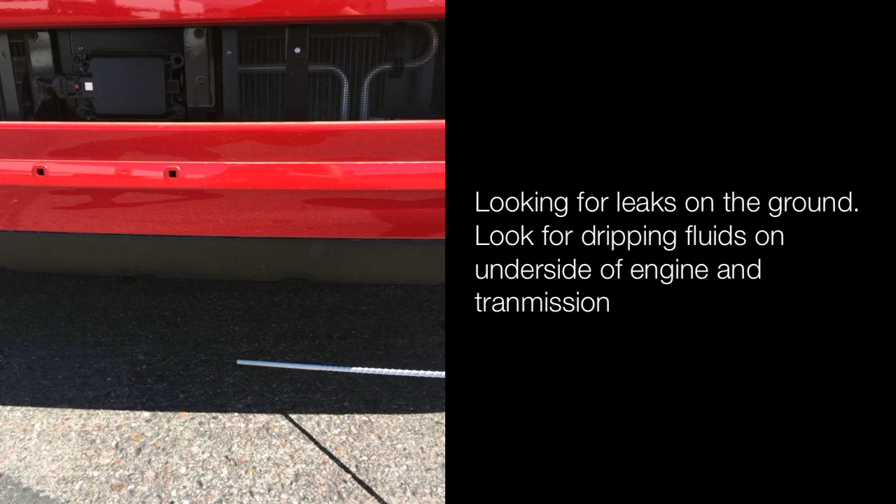Looking for leaks on the ground, look for dripping fluid off the underside of the engine and transmission. Open the hood compartment and move to the passenger side.

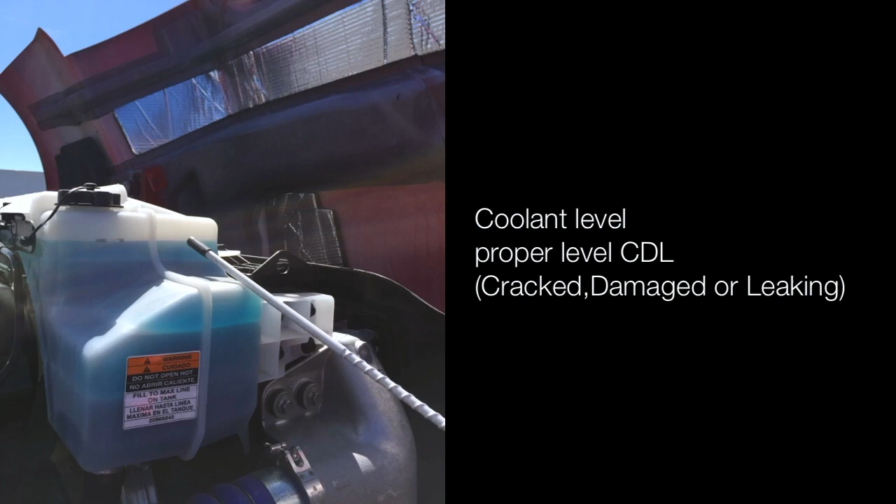Coolant reservoir is properly mounted and secured, not cracked, damaged, or leaking. Coolant level is proper level and not cracked, damaged, or leaking. Hoses are not leaking. Clamps are tight.

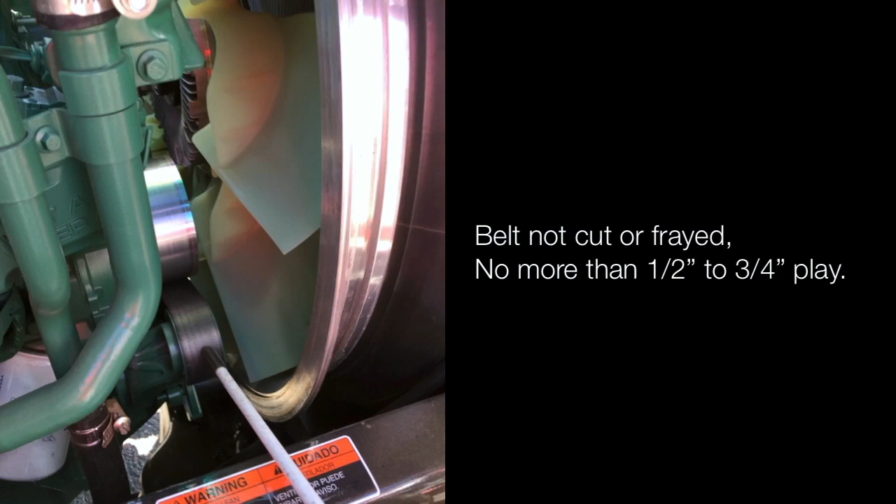Water pump is not cracked, damaged, or leaking, properly mounted and secure. It is belt driven. Belt is not cut or frayed, no more than 1/2 inch to 3/4 inch of play.

Frame is not cracked or bent, no illegal welds or drill holes.

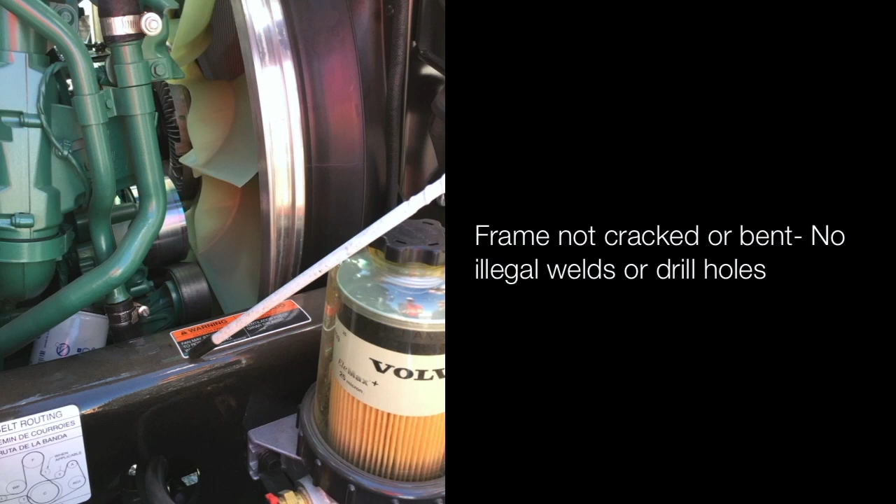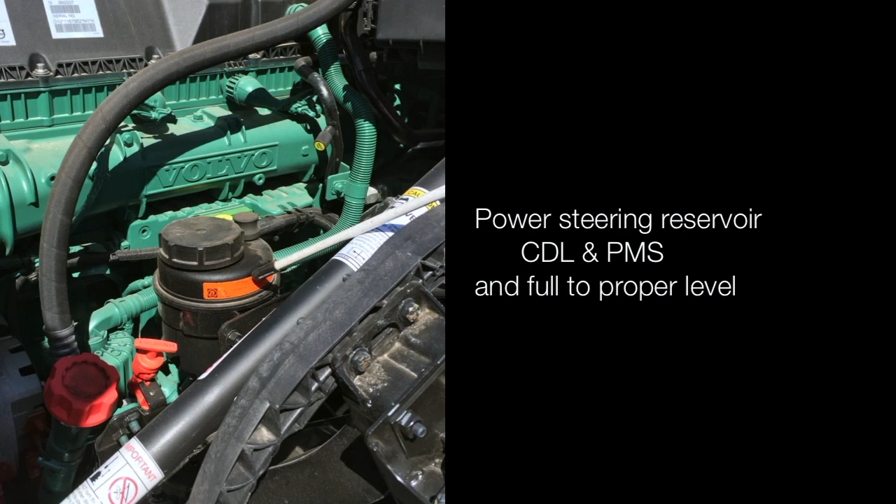Power steering pump is not cracked, damaged, or leaking, and it is properly mounted and secured, and it is gear driven. Air compressor is not cracked, damaged, or leaking, and properly mounted and secured, and it is gear driven. Power steering reservoir is not cracked, damaged, or leaking, and properly mounted and secured, and full to the proper level.

Oil level full, with no water or metal shavings in it. Engine oil dipstick reads above add mark and in safe operating range.

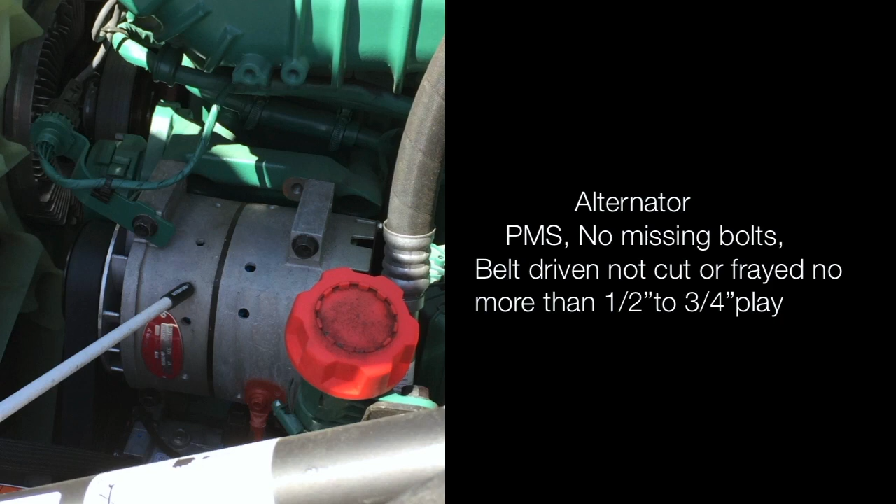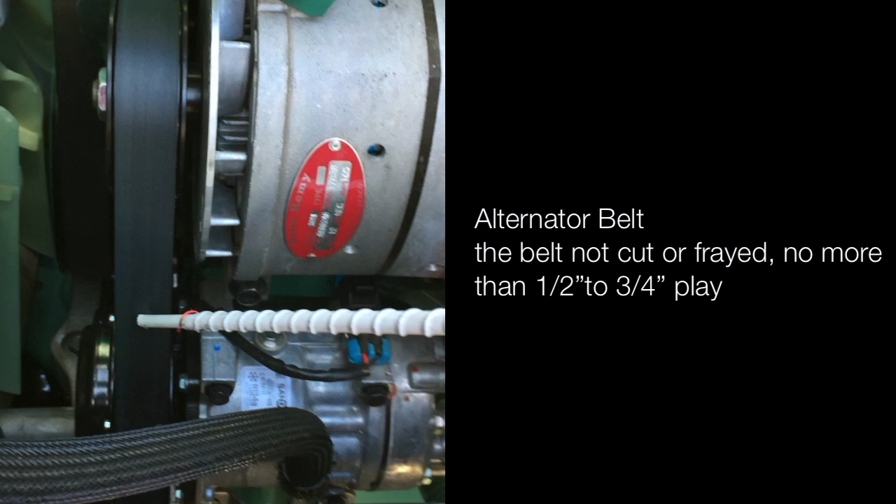Alternator, properly mounted and secure, no missing bolts, and it is belt driven. The belt is not cut, frayed, or no more than 1/2 to 3/4 inch of play.

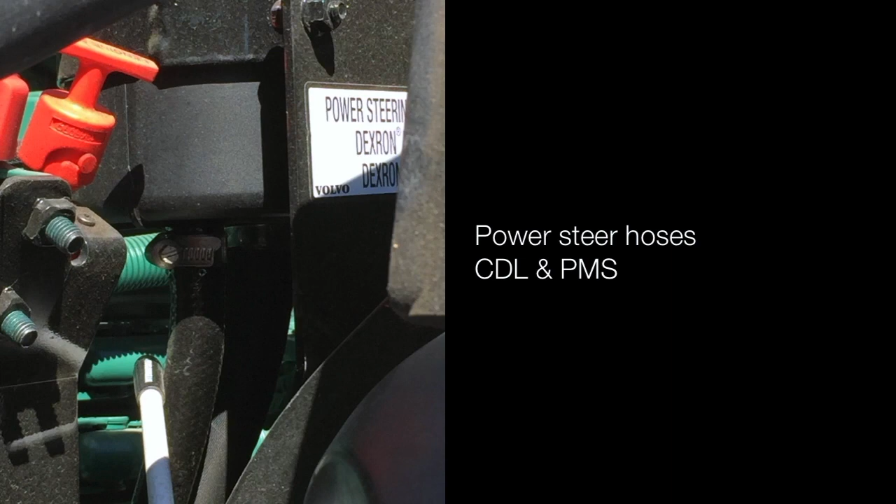Power steering gearbox, properly mounted and secured, not cracked, damaged, or leaking. Power steering hoses, not cracked, damaged, or leaking, and properly mounted and secured. Power steering gearbox hoses, not cracked, damaged, or leaking, and properly mounted and secured.

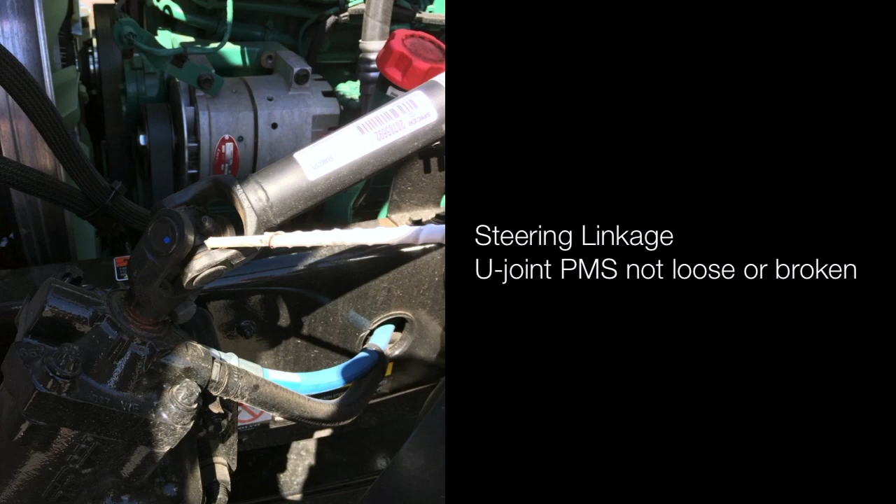Steering linkage, U-joints, properly mounted and secured, not loose or broken. Steering linkage is not bent or missing crown nuts or cotter pins.

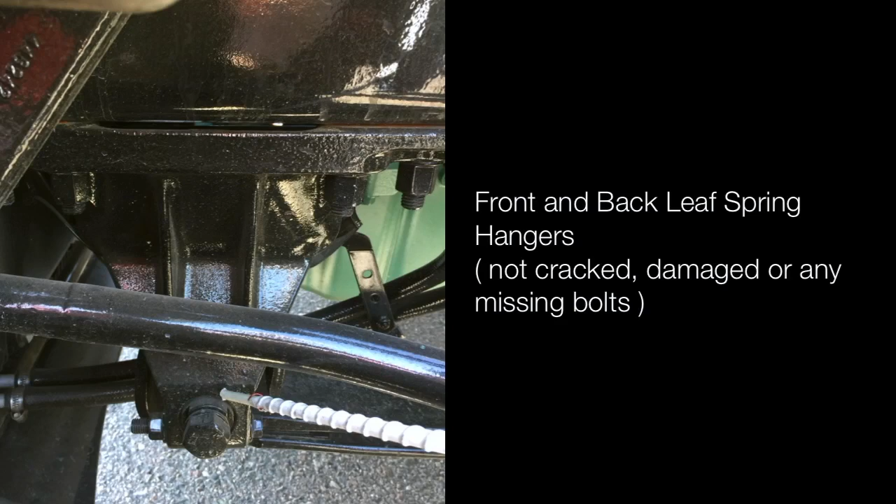Front and back leaf spring hangers, not cracked, damaged, or any missing bolts. Leaf springs, not cracked, damaged, or scissored. U-bolts and saddles properly mounted and secured to the axle, not cracked, damaged, or missing.

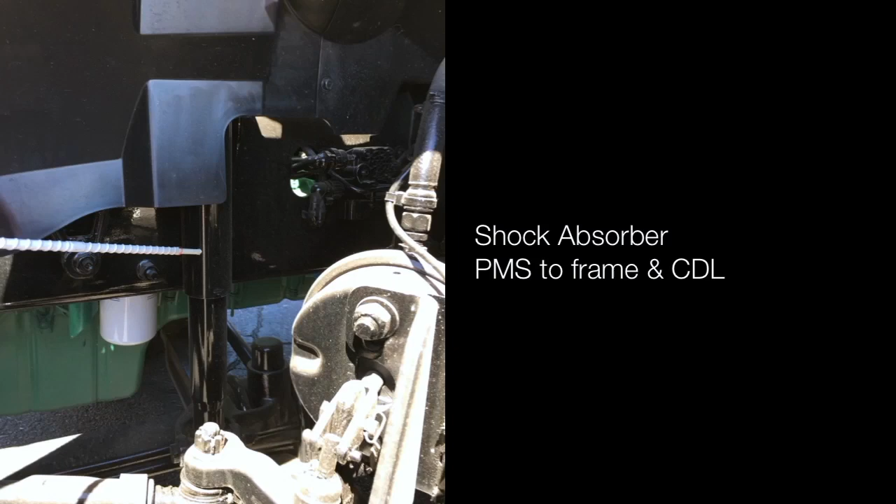Shock absorbers, properly mounted and secured to the frame and not cracked, damaged, or leaking. Hoses, not cracked, damaged, or leaking.

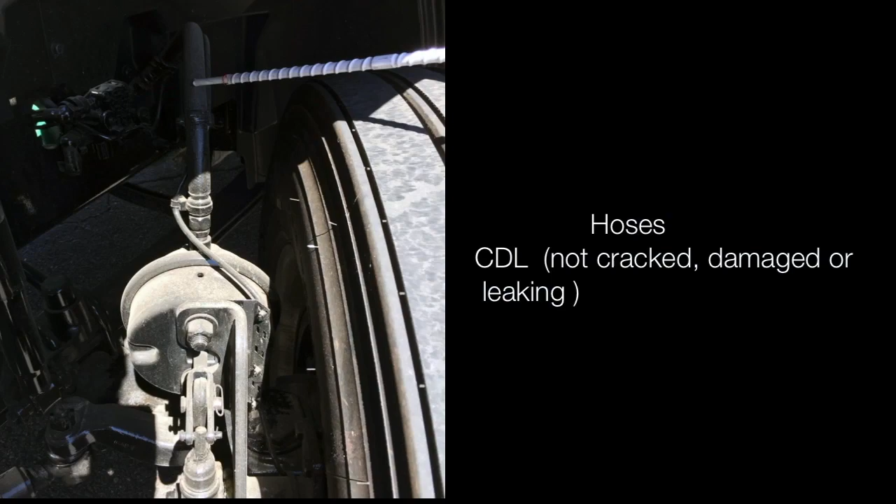Brake chamber, properly mounted and secured, not cracked, damaged, or leaking. Brake chamber clamp, properly mounted and secured, no loose or missing clamps. Push rod not bent or damaged, should be at about a 90-degree angle to the slack adjuster if properly adjusted.

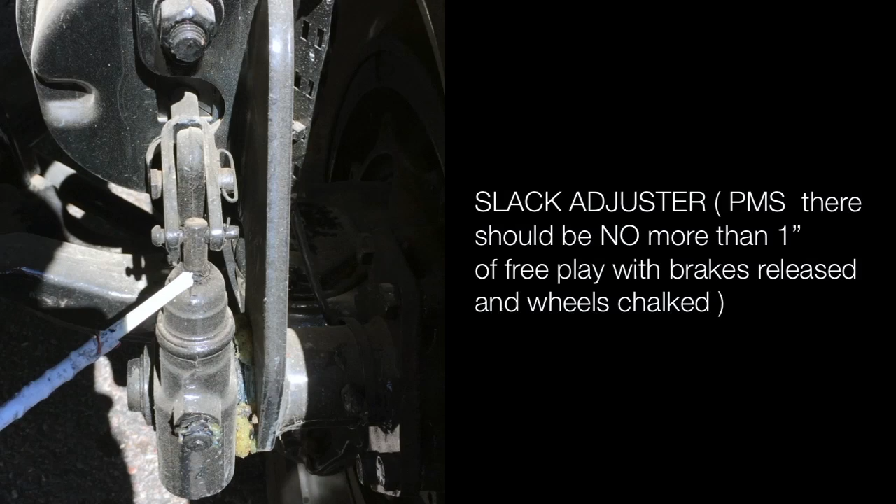Slack adjuster properly mounted and secured. There should be no more than 1 inch of free play with brakes released and wheels chocked.

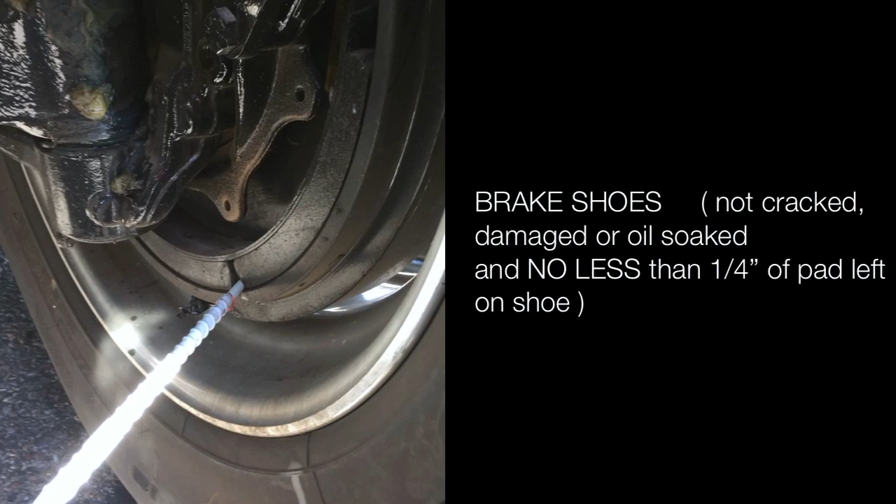Brake drum not cracked, damaged, no oil or debris, no color change which would indicate overheating. Brake shoes not cracked, damaged, or oil soaked, and no less than 1/4 inch of pad left on shoes.

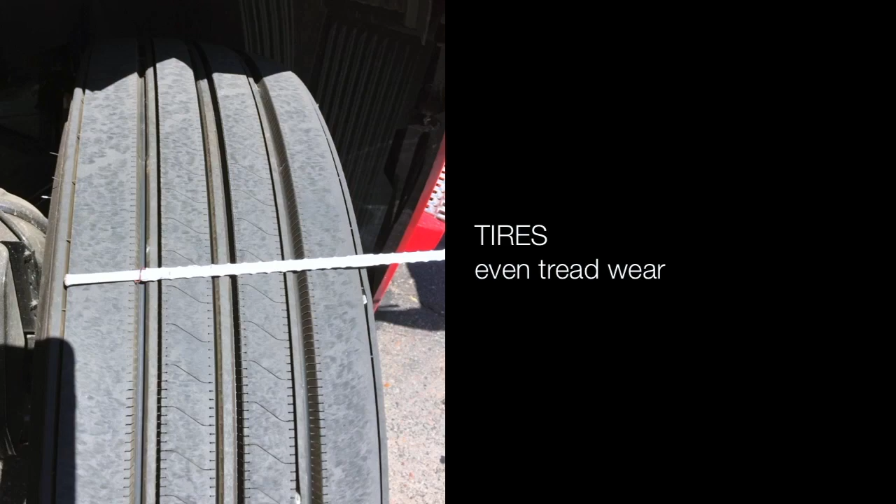Steer tires, sidewalls with no abrasions, bulges, or cuts. Tires have even tread wear. Steer tires, depth no less than 4/32, also checked with a gauge.

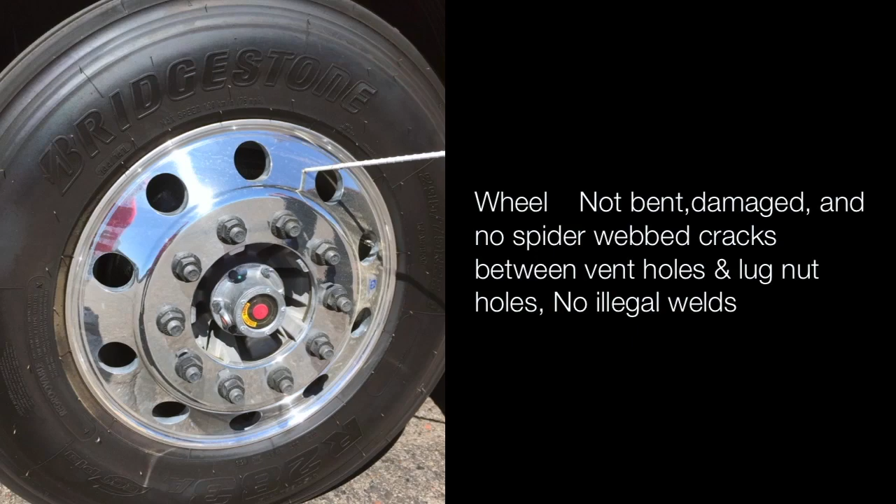Wheels, no damage to bead or bent. Wheels not bent, damaged, and no spider web cracks between vent holes and lug nut holes. No illegal welds. Valve stem inflation 100 psi or manufacturer's specification.

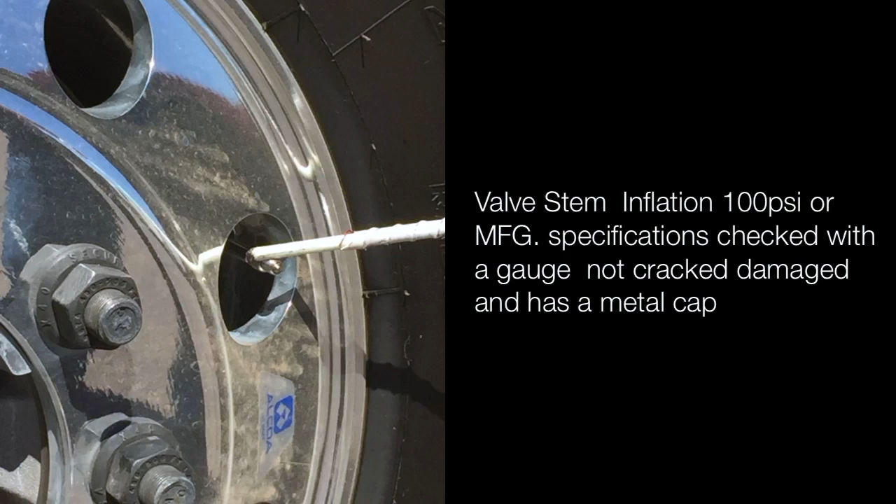Check with a gauge, not cracked, damaged, or leaking. Must have a metal cap. Lug nuts not loose, damaged, or missing. No rust trails or shiny threads to indicate looseness.

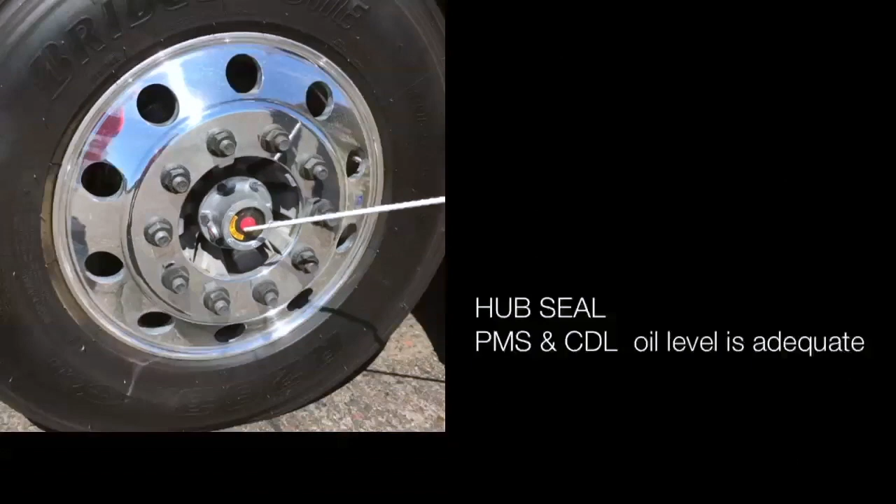Hub seal properly mounted and secured, not cracked, damaged, or leaking. Oil level is adequate. Now close the hood.

Check steps into the cab, the battery box behind the step door, and is secured. Connections, no corrosion, batteries not damaged or leaking. Battery connection shows no excessive corrosion.

Batteries are secured. Connections are tight and secured. No corrosion. Batteries are not damaged or leaking.

Driver door, mirror and mounting brackets is not damaged and properly mounted and secured. Check the door, opens and closes tightly.

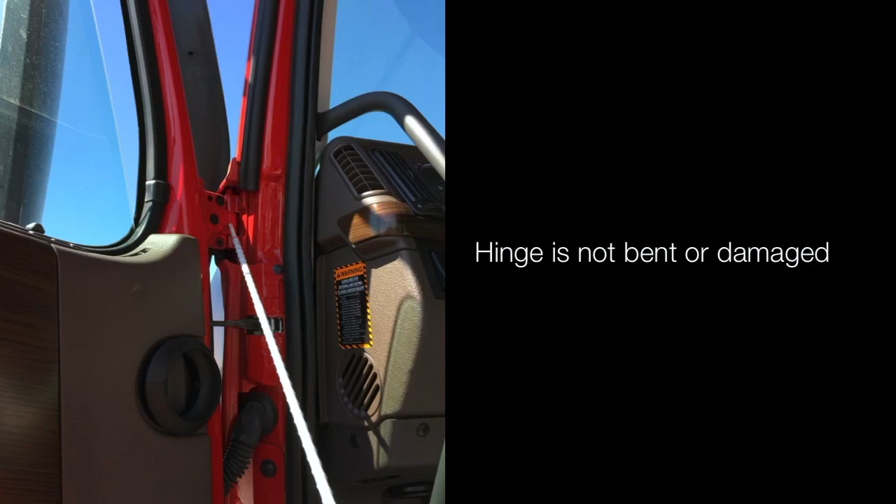Window goes up and down. Hinges is not bent or damaged. Door seal not damaged and is a tight fit.

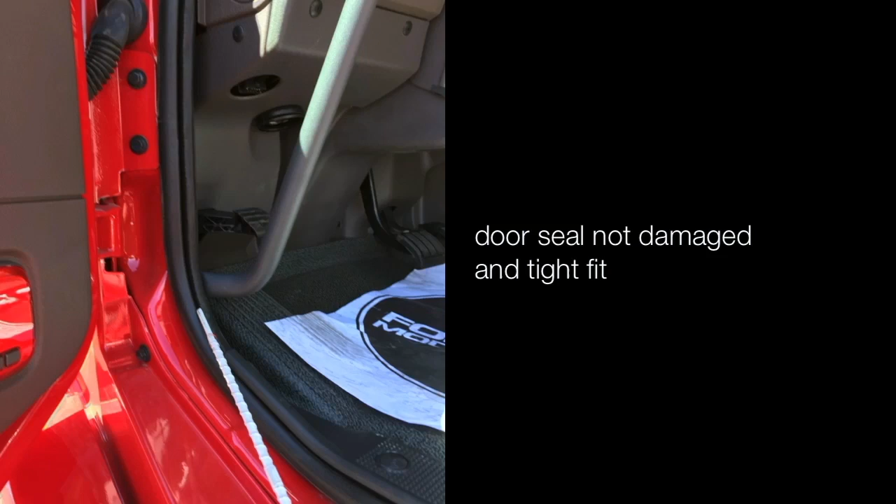Emergency equipment, fire extinguisher properly mounted and secured, fully charged. Minimum BC10 rating if hauling hazmat. 3 triangles in working condition, not cracked or damaged.

Spare fuses or breakers if needed.

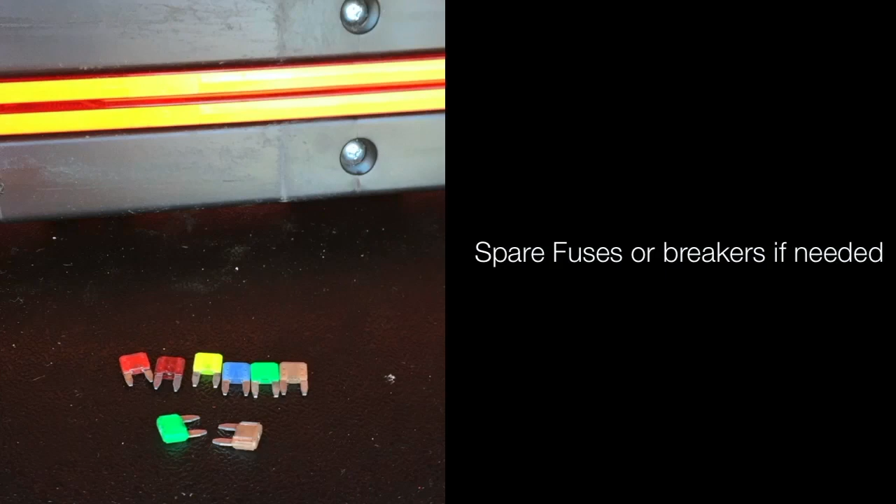This time I'm going to grab my chock block, put it underneath the tire for doing my air brake test.

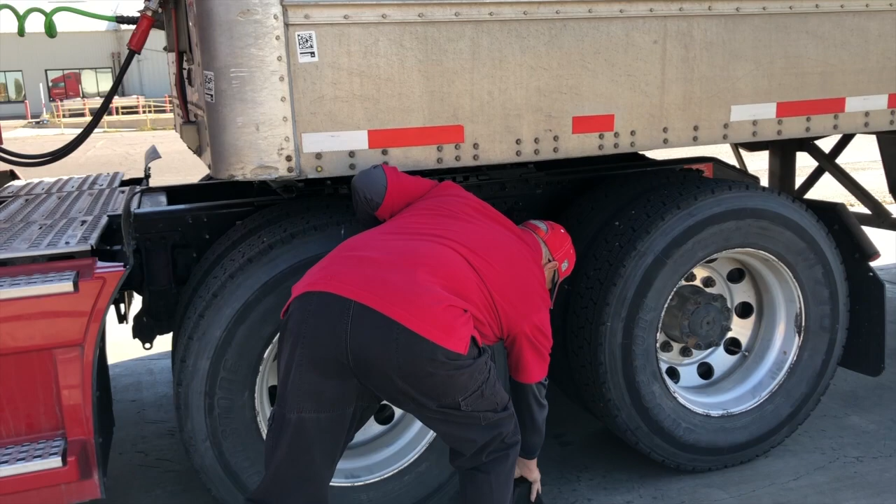All right, Mr. Examiner, can you help me with my light test?

Start your in-cab inspection. Check internal lights. Ask the examiner to assist you in the light check. Front of the truck check: 4 ways, flashers, right turn signal, left turn, marker lights, headlights, high and low beams. Next, the tractor side turn and 4 ways.

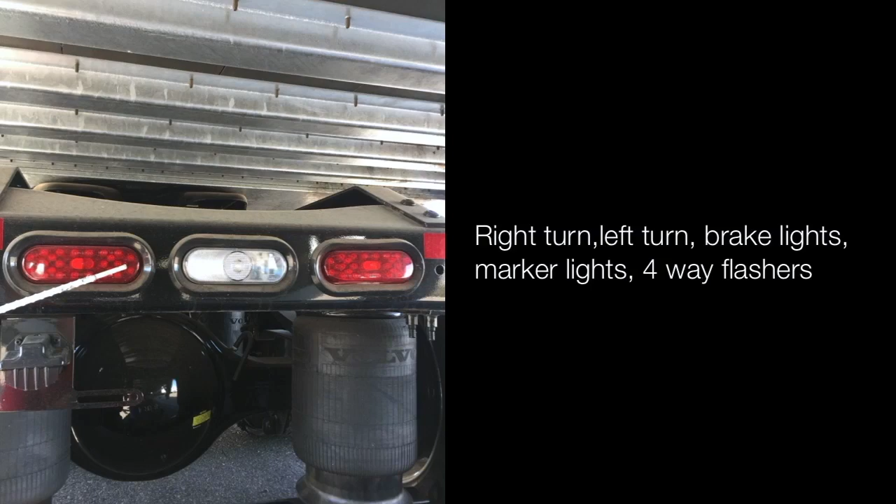Ask the examiner to go to the rear of the tractor, and the clearance light on top of the trailer. Right turn, left turn, brake lights, marker lights, 4 ways, and your running lights or tail lights. Side of the trailer for yellow marker lights and turn signal and 4 ways.

On the way back, have the examiner check your ABS light by turning the key off and back on, and the marker light. Your clearance lights on the rear of the trailer. Tail lights. The rear of the trailer: right turn, left turn, brake lights, marker lights, four-way flasher. Then have the examiner enter the truck and complete your in-cab and air brake test.

All right, Mr. Examiner, I'm going to put my seatbelt on. Can you put yours on? While I'm doing that, I'm checking that it latches, unlatches, and latches in. Checking for any kind of tears, rips, or frays, and it's adjusted for my liking. Next, I'm doing my windows. My windows are properly mounted and secured. They're not cracked, damaged, broken, or leaking. They do not have any illegal stickers on them.

Next, I'm going to look at my windshield. My windshield is properly mounted and secured. It's not cracked, damaged, broken, or leaking, and also does not have any illegal stickers. I'm going to get back to it, but I'm going to look at my windshield wipers right now. My windshield wipers are a nice, tight fit to the windshield, and the blades are not torn, ripped, or frayed.

Next, I'm going to look at my mirrors. My mirrors are properly mounted and secured. They're not cracked, damaged, or broken, and they're adjusted for my liking. Mr. Examiner, I'm going to do a safe start. I am in neutral. My brakes are set. My foot on the brake. Start it up. My ABS lights came on and went off.

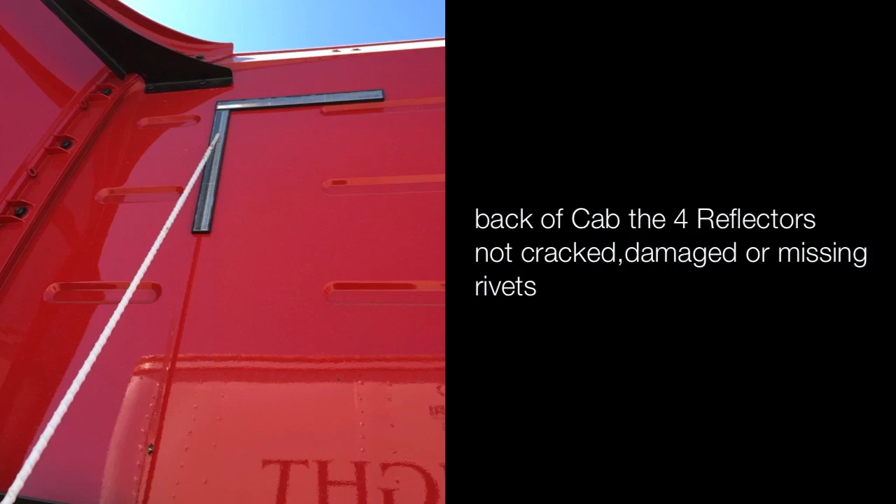When you're done with the inside cab and air brake test, check the side and rear of the tractor for no cuts and damage. Turn signal amber in color, clean and working condition, not cracked or broken. Back of the cab, the 4 reflectors not cracked, damaged, or missing rivets. Work light, properly mounted and secured, clean and working, not cracked or broken.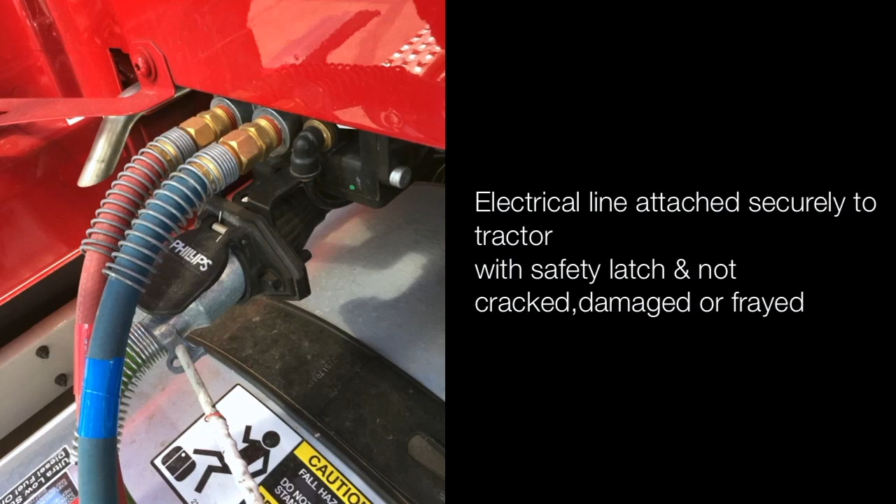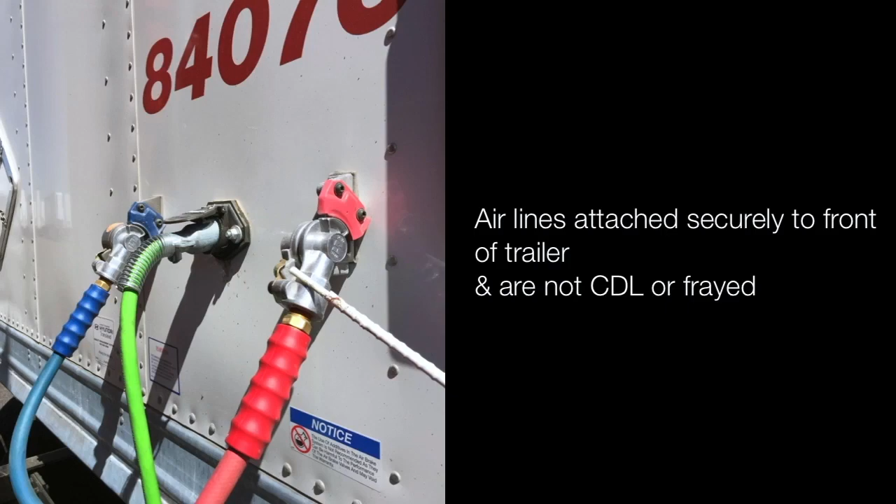Electric lines attached securely to the tractor with safety latch and not cracked, damaged, or frayed. Air lines not cracked, damaged, or leaking, attached securely to the tractor. Air lines attached securely to the front of the trailer and not cracked, damaged, leaking, or frayed. Electric lines attached securely to the front of the trailer with safety latch and not cracked, damaged, or frayed.

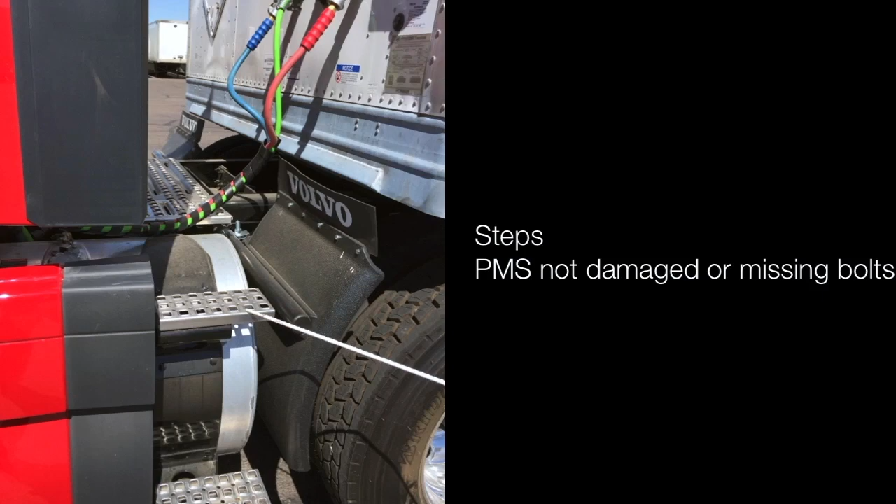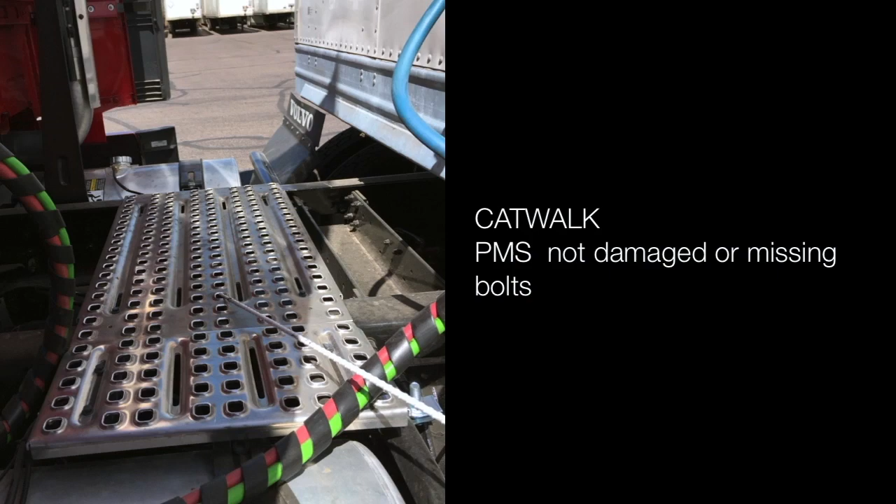Header board not damaged, no missing rivets. Steps properly mounted and secured, not damaged or missing bolts. Catwalk properly mounted and secured, not damaged or missing bolts. U-joints secured and free of debris. Drive shaft not cracked, bent, or damaged.

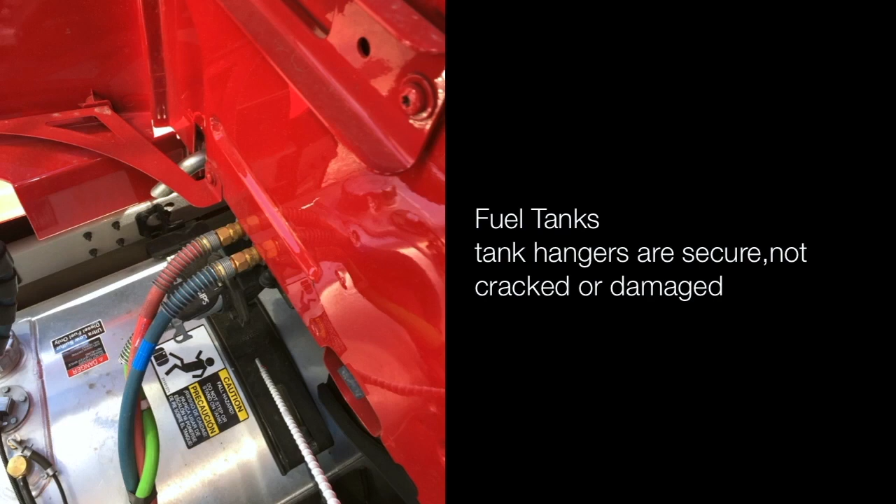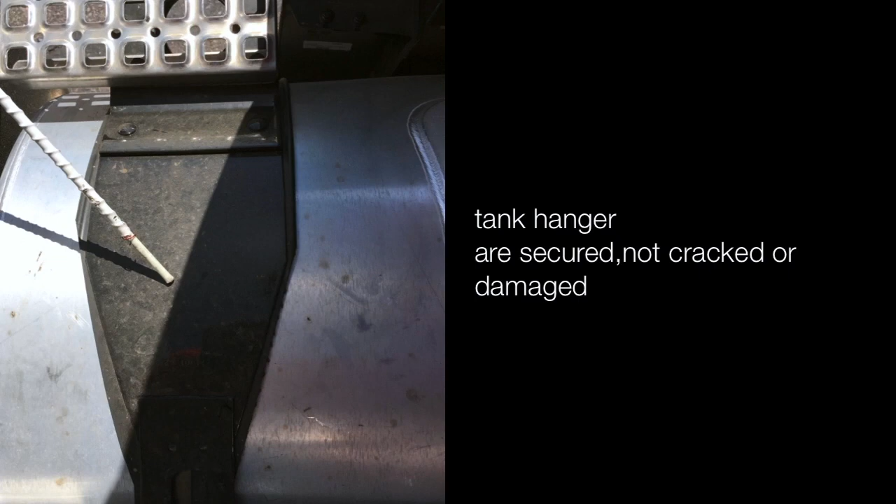Fuel tank. Fuel tank hangers are secured, not cracked or damaged. Tank hangers are secured, not cracked or damaged. Fuel cap is tight, no leaks from tank or fuel lines. Splash guard, not damaged and covers both wheels.

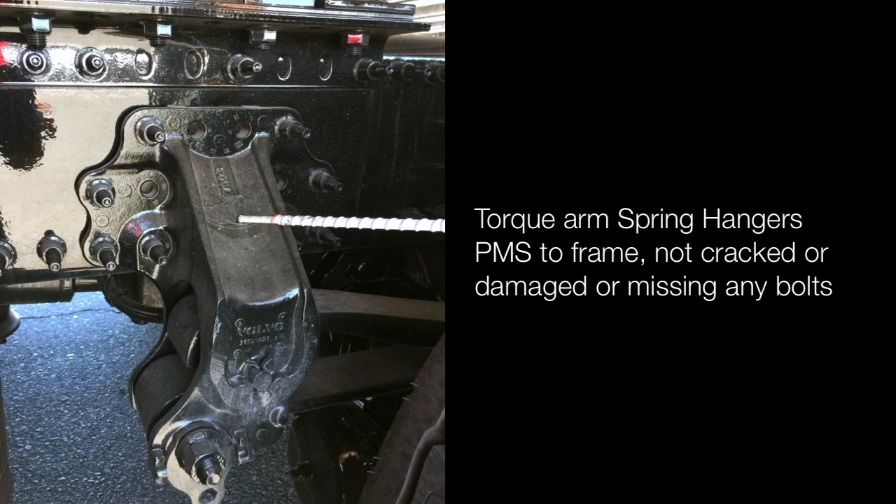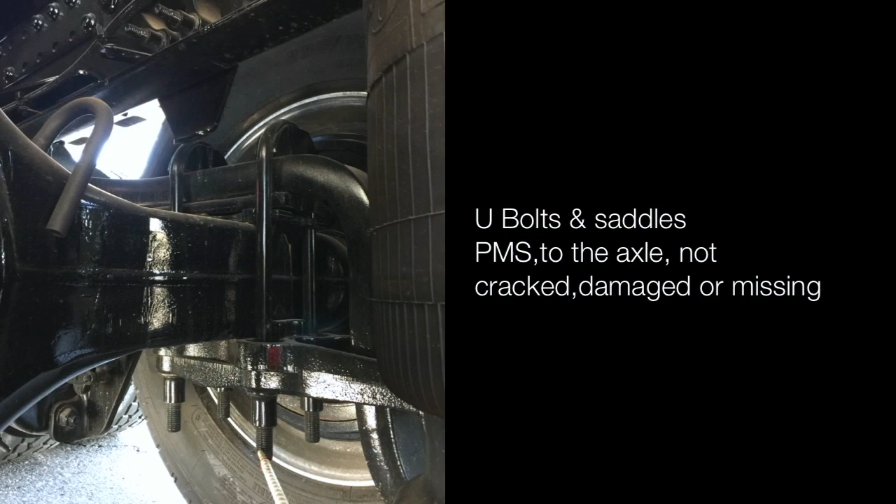Torque arm spring hangers, properly mounted and secured to the frame, not cracked or damaged or missing any bolts. Torque arm springs, not cracked, damaged, or scissored. U-bolts and saddles, properly mounted and secured to the axle, not cracked, damaged, or missing. Shock absorber, properly mounted and secured to the frame, not cracked, damaged, or leaking.

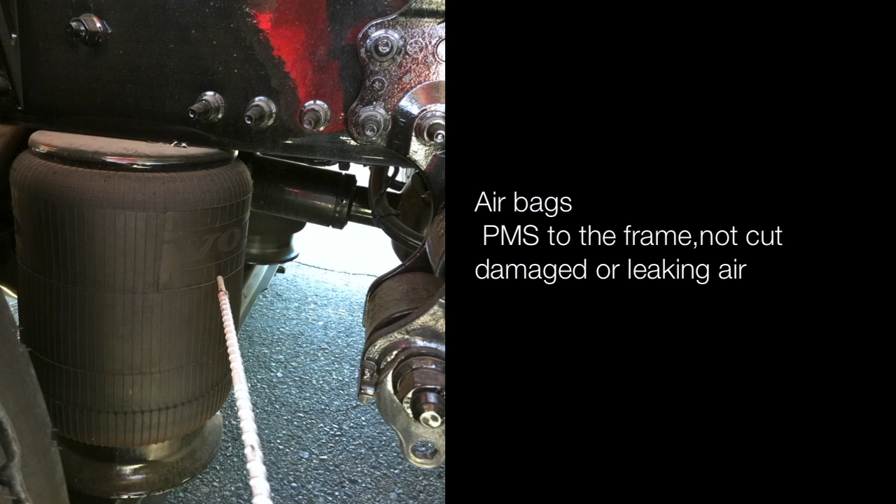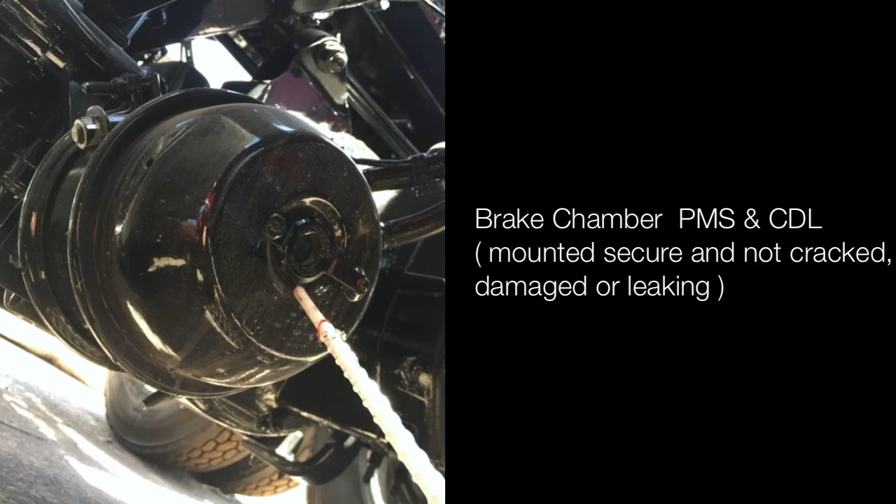Airbags, properly mounted and secured to the frame, not cut, damaged, or leaking air. Airbags are properly mounted and secured to the frame, mounting bolts in place, not cracked or damaged. Brake hoses, not cracked, damaged, or leaking. Brake chamber, properly mounted and secured, not cracked, damaged, or leaking. Brake chamber clamp, properly mounted and secured, no loose or missing clamps.

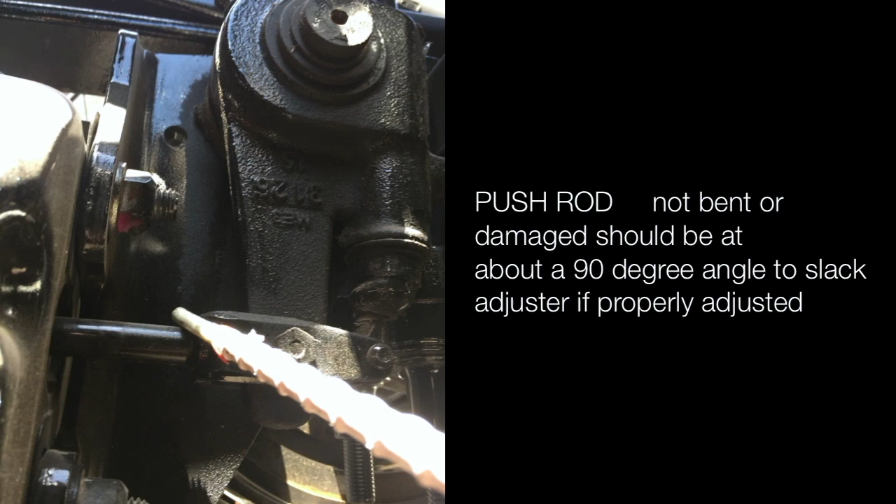Push rod, not bent or damaged, should be about a 90-degree angle to slack adjuster if properly adjusted. Slack adjuster, properly mounted and secured, there should be no more than 1 inch of free play with brakes released and wheels chocked. Brake shoes, not cracked, damaged, or oil soaked, and no less than 1/4 inch pad left on the shoes. Brake drum, not cracked, damaged, no oil or debris, no color change, which would indicate overheating.

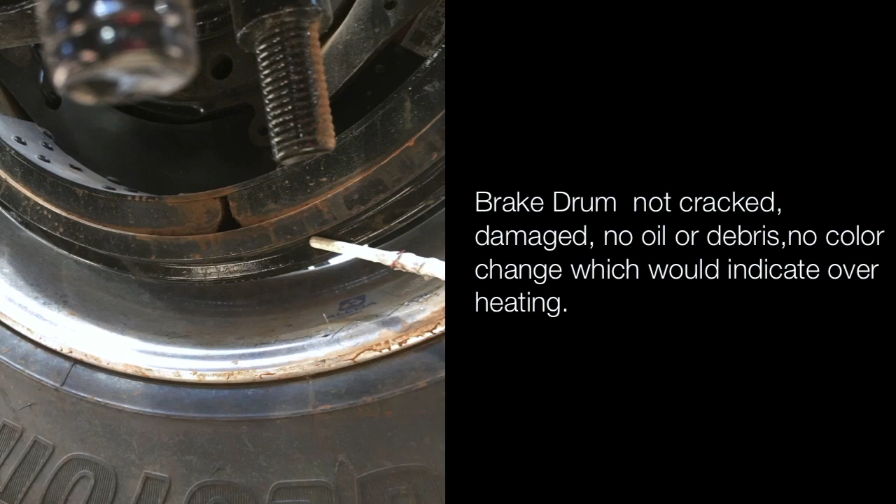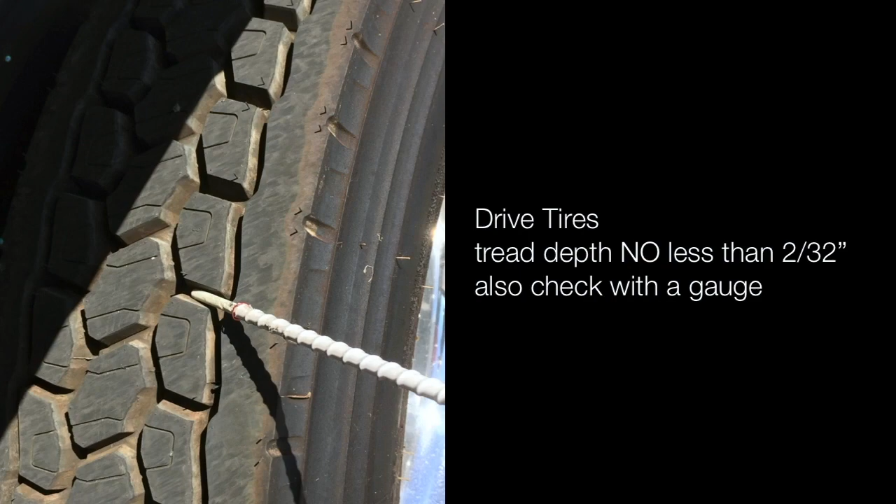Drive tires, sidewalls have no abrasions, bulges, or cuts, inflated to 100 psi or manufacturer specification. Check with a gauge. Drive tires, even tread wear. Tread depth, no less than 2/32, also checked with a gauge. Rims are budd wheels, evenly spaced, and no debris between them.

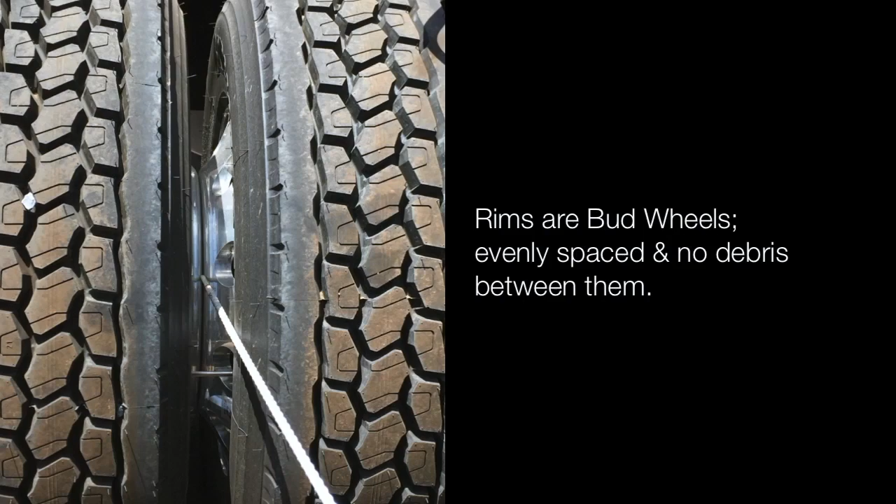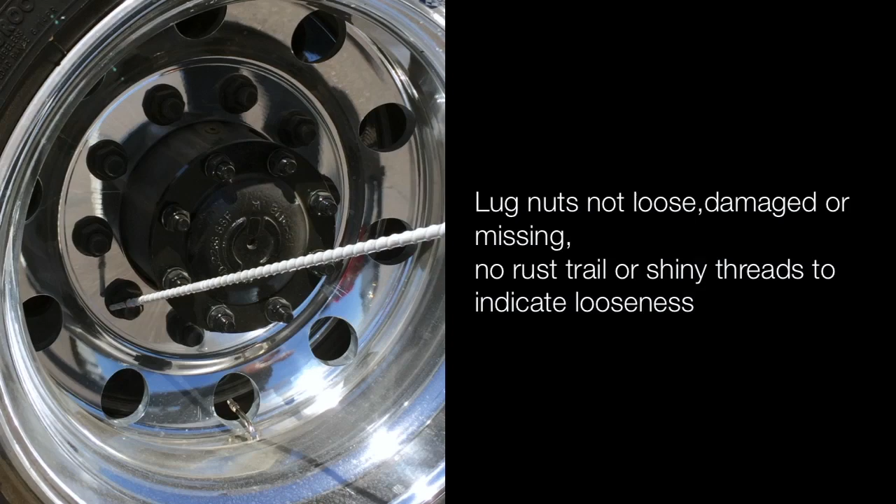No damage to the beads. Wheels not bent, damaged, or no spider webbed crack between vent holes and lug nut holes. No illegal welds. Lug nuts not loose, damaged, or missing. No rust trails or shiny threads to indicate looseness. Hub seal, properly mounted and secured, not cracked, damaged, or leaking.

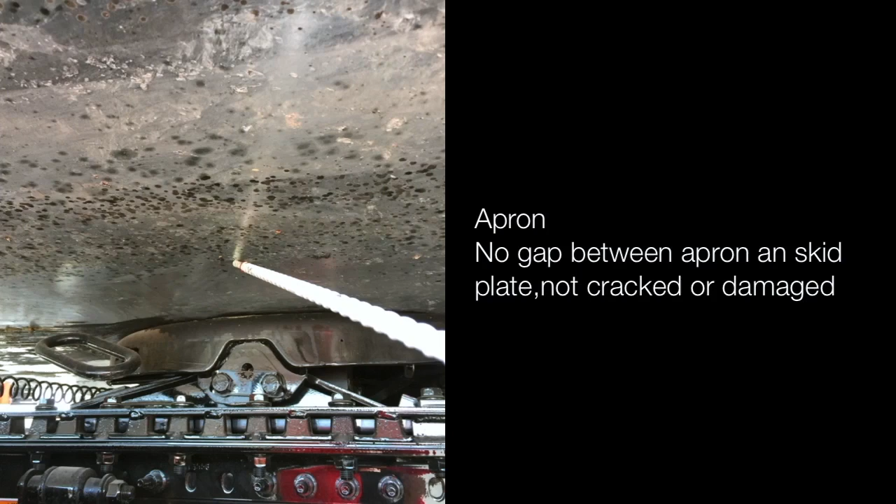Valve stem, inflation 100 psi or manufacturer specifications. Checked with a gauge, not cracked, damaged, or leaking. Also has a metal cap. Apron, no gap between the apron and skid plate, not cracked or damaged. The skid plate, no gap between the apron and skid plate, not cracked or damaged.

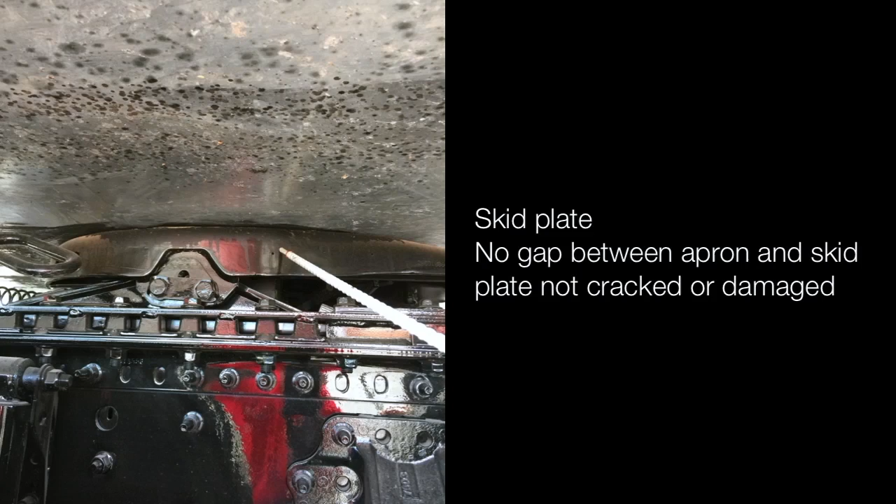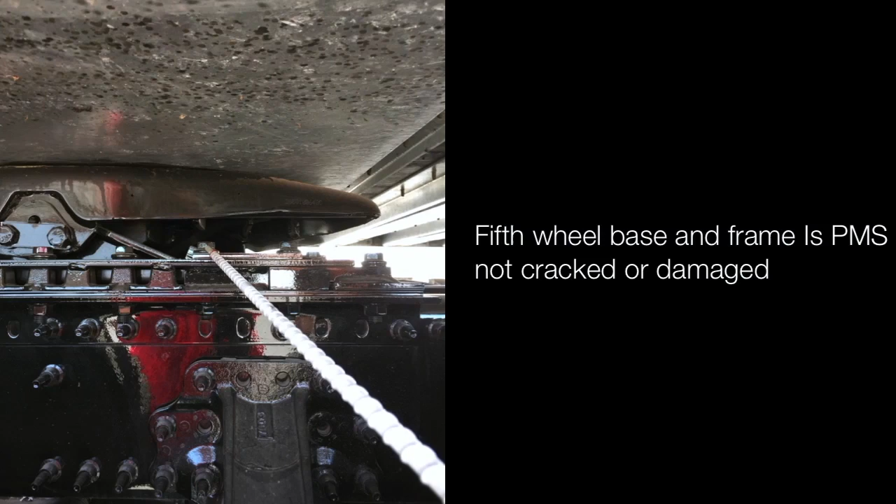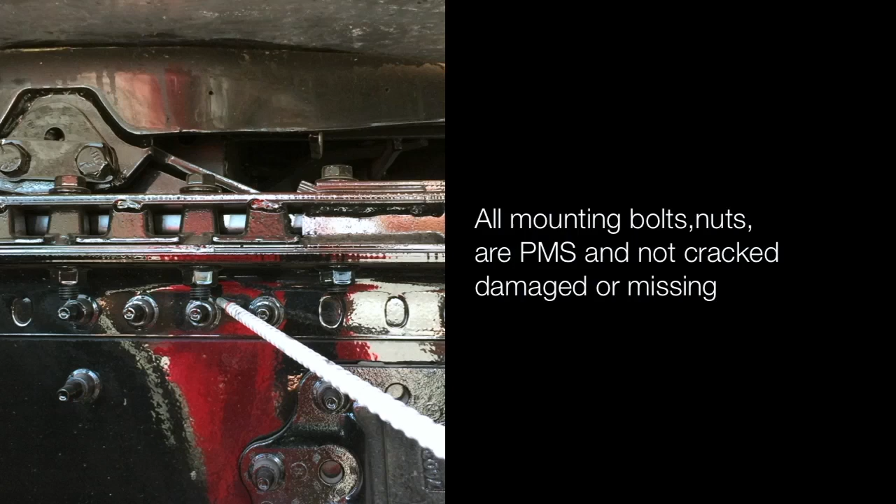The fifth wheel release arm is not bent or damaged and in the locked position. Sliding fifth wheel locking pins in locked position and not damaged. Fifth wheel base and frame is in proper mounting and secured, not cracked or damaged. All mounting bolts and nuts are properly mounted and secured and not cracked, damaged, or missing.

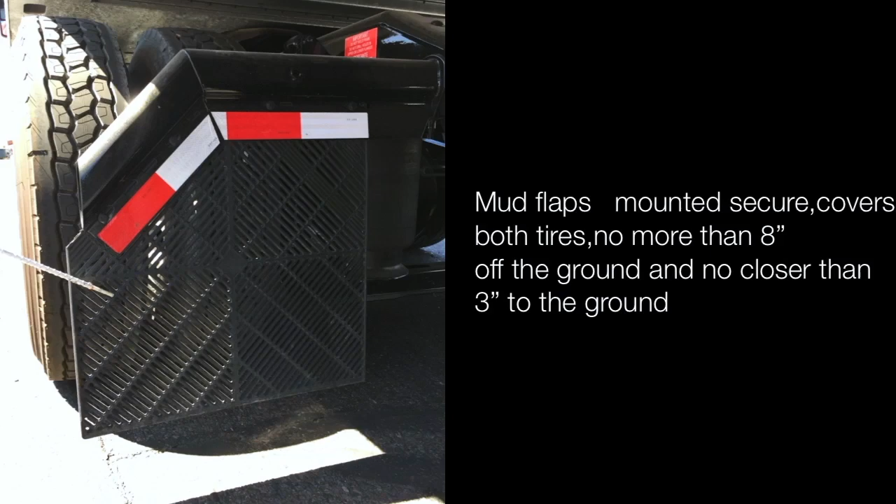Air actuator, look for cracked, damaged, or leaking and properly mounted and secured. Mud flaps, mounted secure and covers both tires, no more than 8 inches off the ground and no closer than 3 inches to the ground. Reflector tape. Reflector. Lights and reflectors not cracked, damaged, or missing, and proper color.

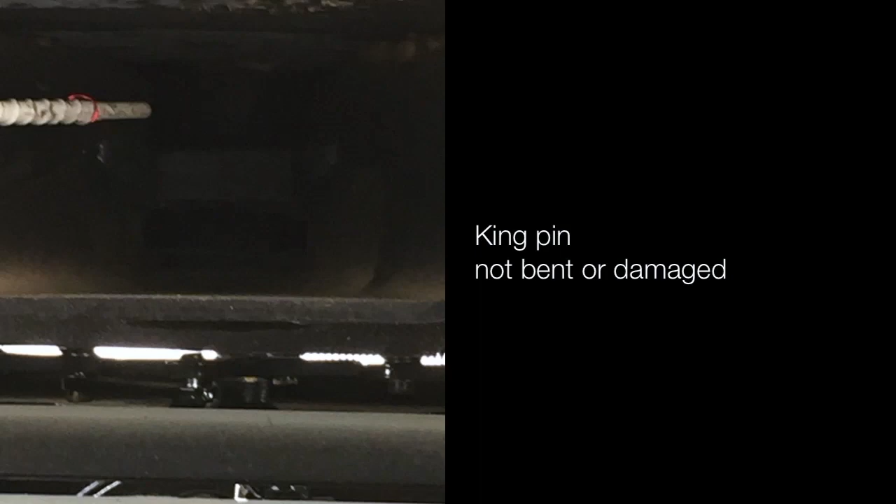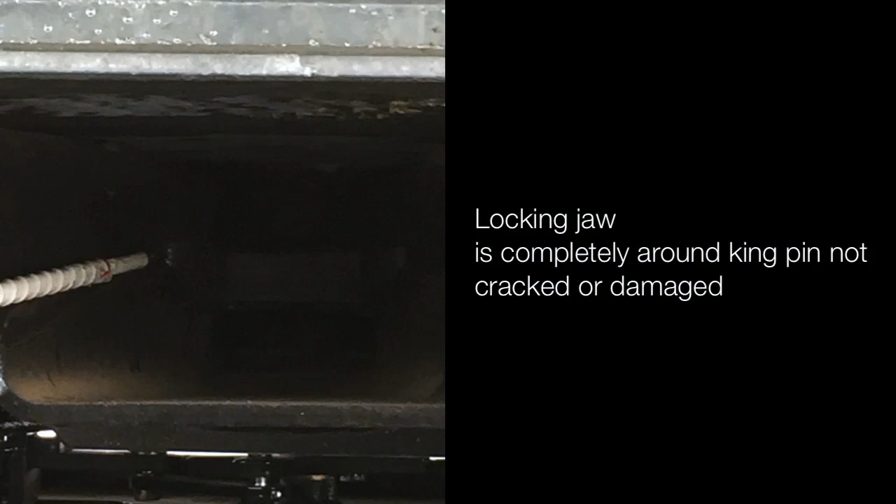Kingpin not bent or damaged. Locking jaw is completely around the kingpin, not cracked or damaged. Turn around and check the trailer frame. Cross beams, landing gear, properly mounted and secured, not damaged, no missing bolts or cracked welds. Your trailer, your frame, and cross beams.

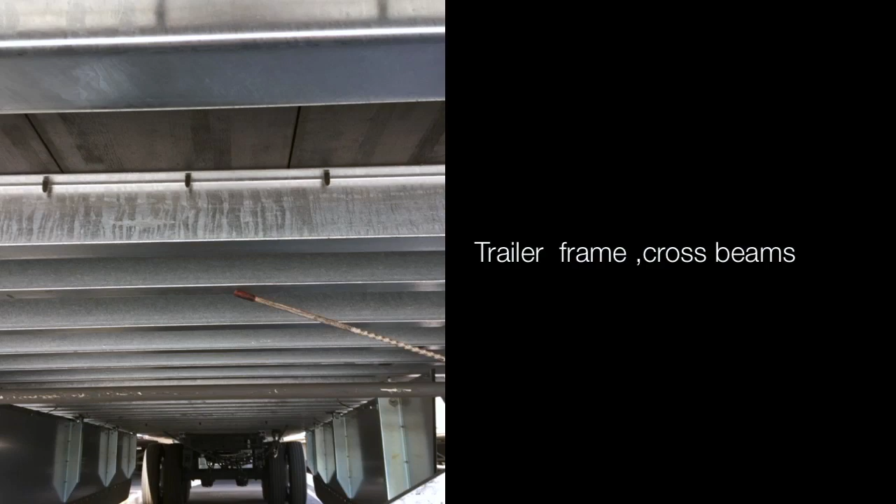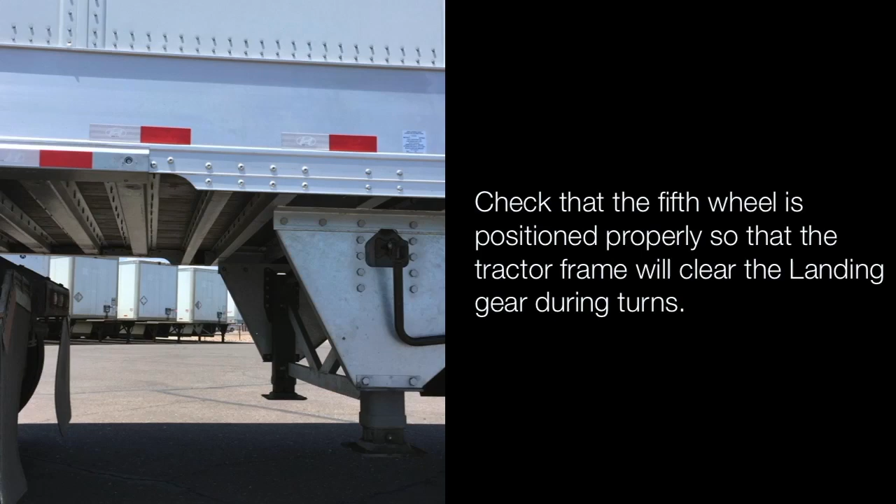Landing pads are fully up. Crank handle in locked and in the cradle. Check that the fifth wheel is positioned properly so that the tractor frame will clear the landing gear during turns. Front and side of the trailer, no cracks, damage, or tears, no missing rivets or bolts.

All marker lights, reflectors, turn signals, four-ways, not cracked, damaged, in proper color yellow. Side of the trailer, no cracks, damage, or tears, no missing rivets or bolts. Red and white reflector tape present and clean, at least 90% all the way around the trailer. Airlines, 18 inches off the ground, not cracked, damaged, or leaking.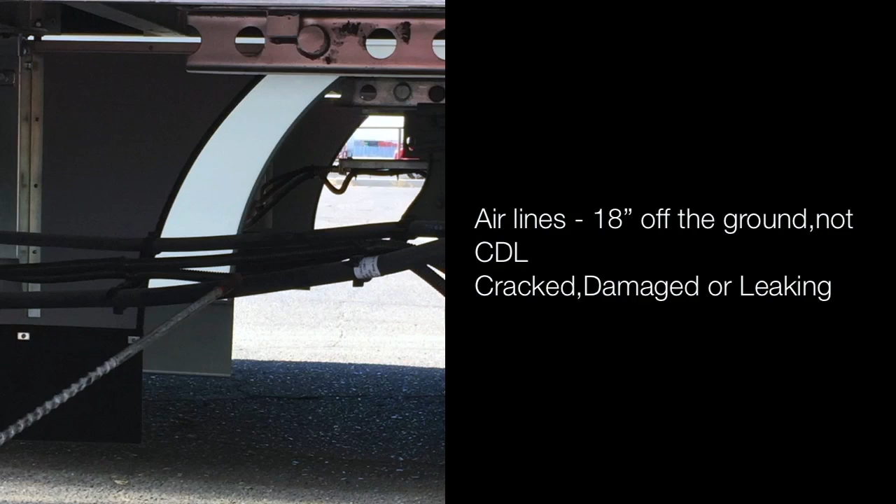Tandem release arm, not damaged and in the locked position. Sliding tandem is not damaged, locking pins in locked position. Leaf spring hanger, mounted and secured, not cracked, damaged, or no missing bolts. Leaf springs, not cracked, damaged, or scissored. U-bolts, not cracked, damaged, or missing.

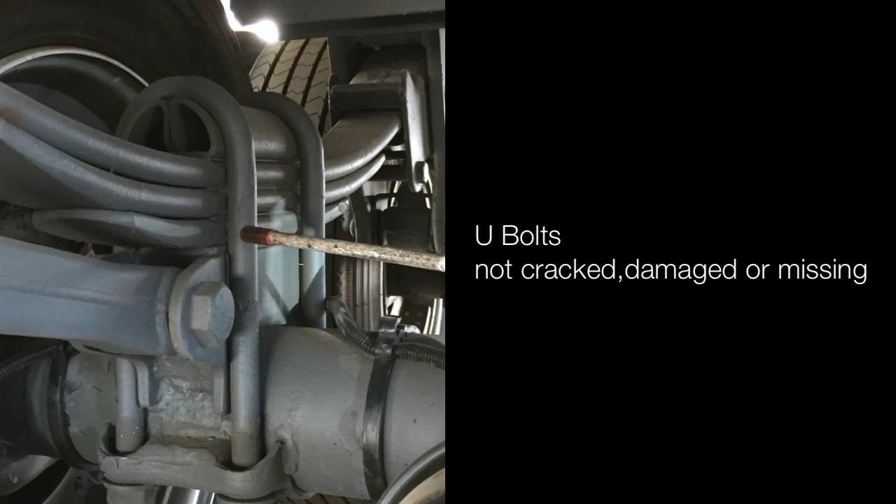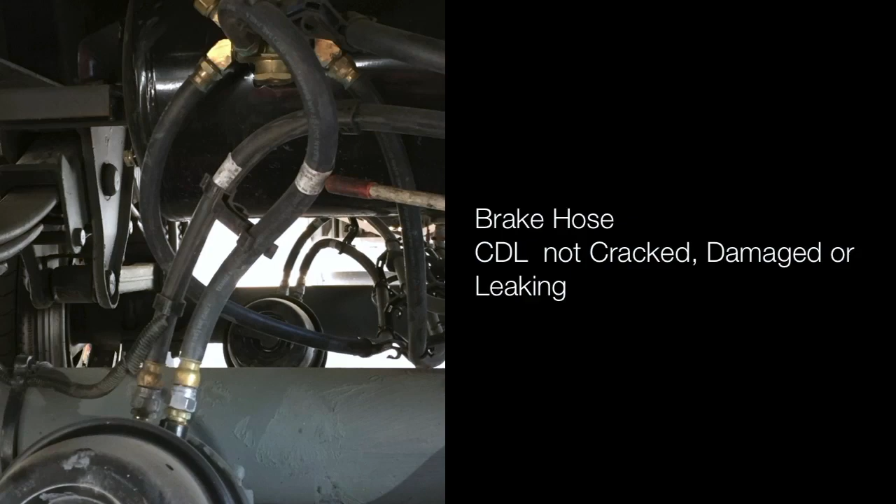Tandem control arm, not cracked, damaged, or broken. Brake hoses, properly mounted and secured, not cracked, damaged, or leaking. Brake chamber, properly mounted and secured, not cracked, damaged, or leaking. Brake chamber clamp, properly mounted and secured. No loose or missing clamps.

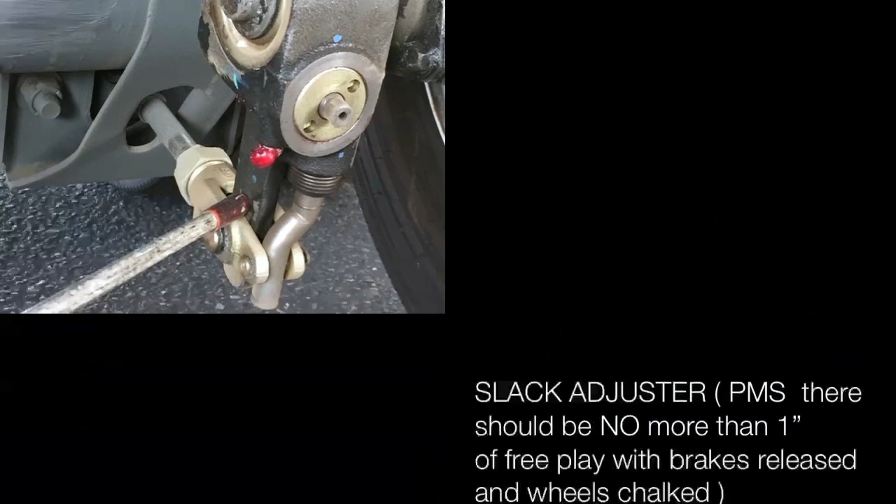Push rod, not bent or damaged, should be at about a 90-degree angle to the slack adjuster if properly adjusted. Slack adjuster, properly mounted and secured. There should be no more than 1 inch of free play with brakes released and wheels chocked. Brake shoes, not cracked, damaged, or oil soaked, and no less than 1/4 inch of pad left on shoes. Brake drum, not cracked, damaged, no oil or debris, no color change, which would indicate overheating.

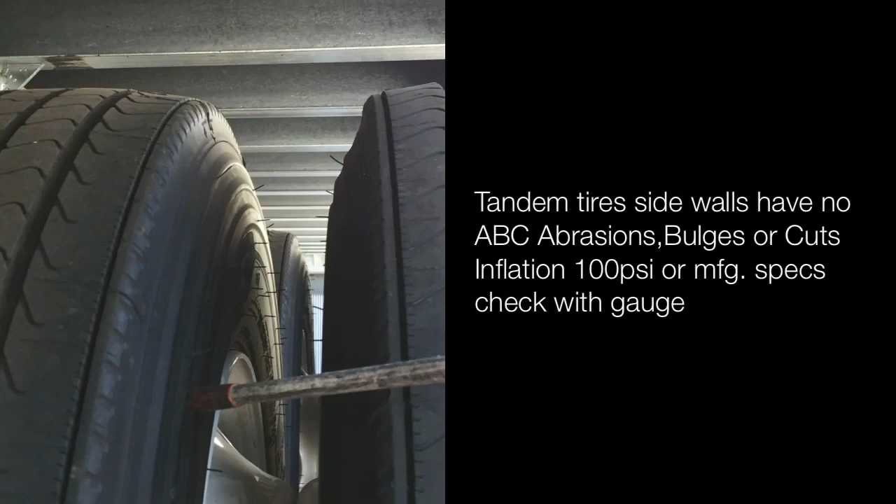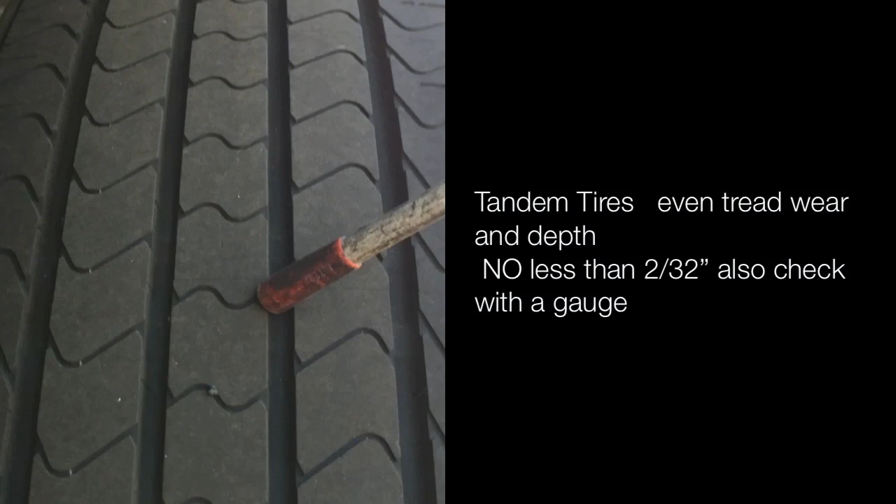Tandem tire sidewalls have no abrasions, bulges, or cuts. Inflated, 100 psi, manufacturer's spec. Check with a gauge. Tandem tires, even tread wear, no less than 2/32, also check with a gauge. Wheel has no damage to bead, not bent, damaged, and no spider web cracks between vent holes and lug nut holes, and no illegal welds. Rims are Budd wheels, evenly spaced, and no debris between them.

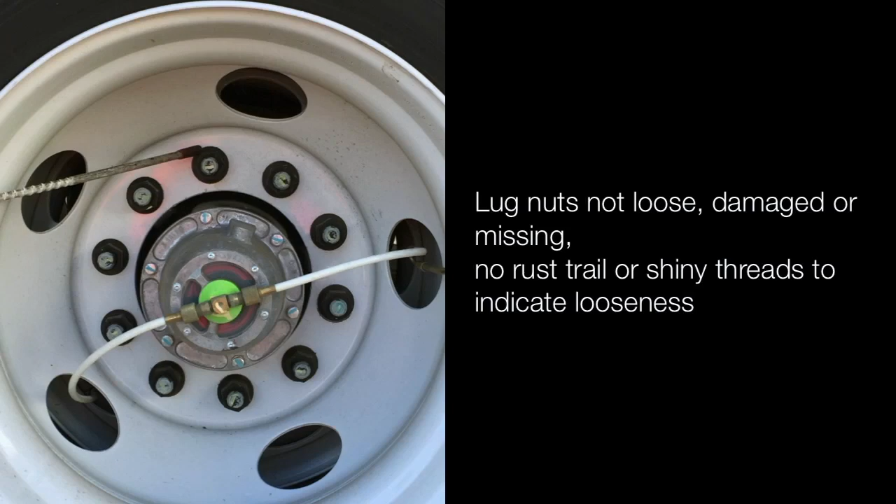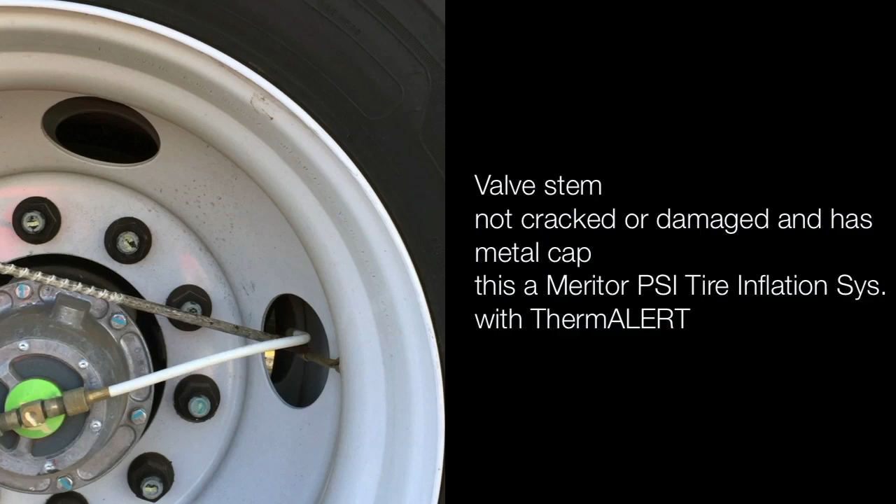Lug nuts not loose, damaged, or missing. No rust trails or shiny threads, which indicate looseness. Valve stems not cracked or damaged and has a metal cap. Hub seal properly mounted and secured, not cracked, damaged, or leaking. Mud flaps mounted secured, covers both tires, no more than 8 inches off the ground and no closer than 3 inches to the ground. Door tie hooks are present, not broken.

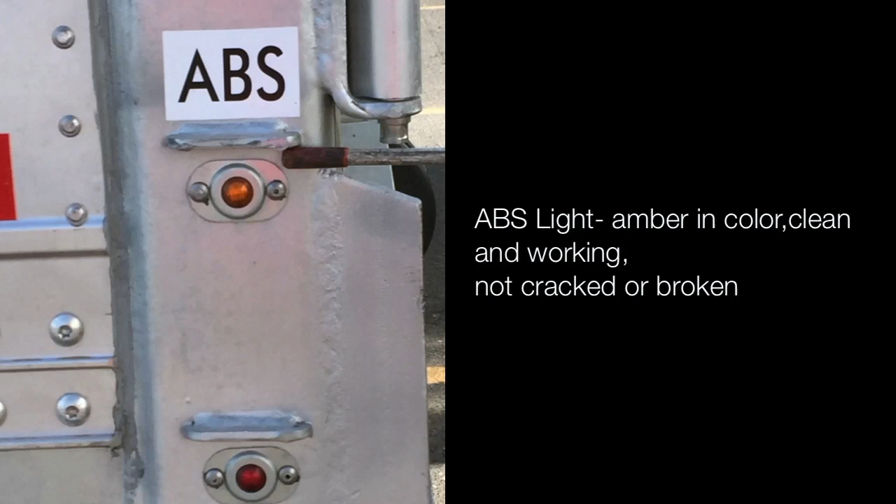ABS light, amber in color, clean and working, not cracked or broken. Marker light, red in color and working, not cracked or broken. Clearance lights, red in color, not cracked, damaged, or missing, clean and working. All lights, tail, brake, clearance lights, red in color, clean and working, not cracked or broken. DOT reflector tape is white, not damaged or missing. DOT reflector tape, red and white, not damaged or missing, 100% on the back.

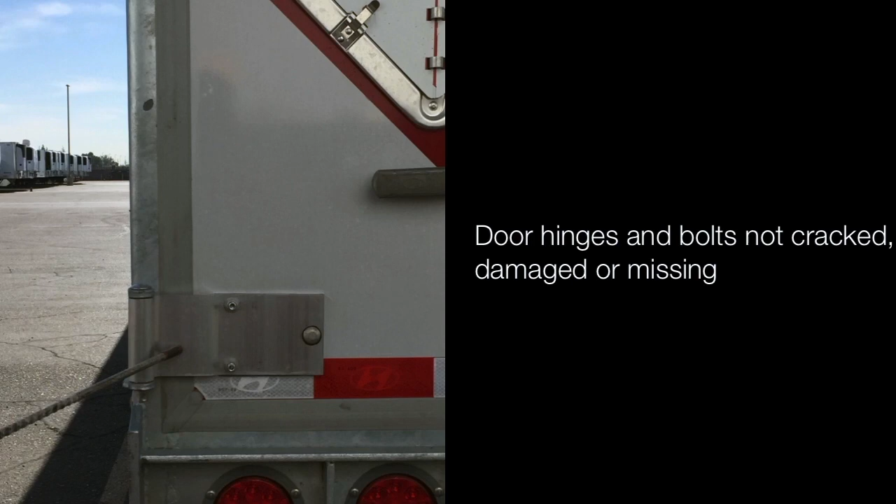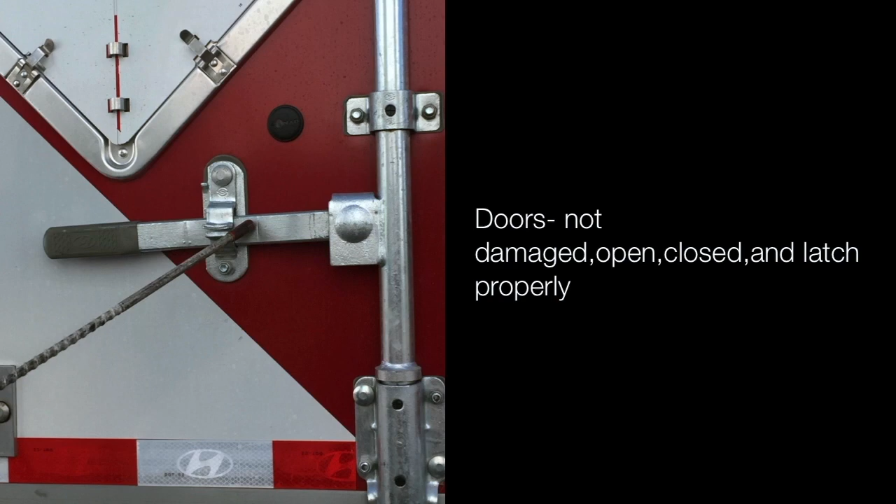Door hinges and bolts, not cracked, damaged, or missing. Door seal is in place, not cracked, damaged, or missing. Latches, top and bottom, are latched properly. Door tie chains are secured and not missing. Doors not damaged, opens, closes, and latches properly.

Tell the examiner you will check the right side as you did the left side, except for what is different on this side. The 3 exceptions: your right turn signal, 4-ways, amber in color, and properly mounted and secured. Check 5th wheel safety release pin. Check your exhaust for cracks, damage, or leaking, indicated by rust or black soot.

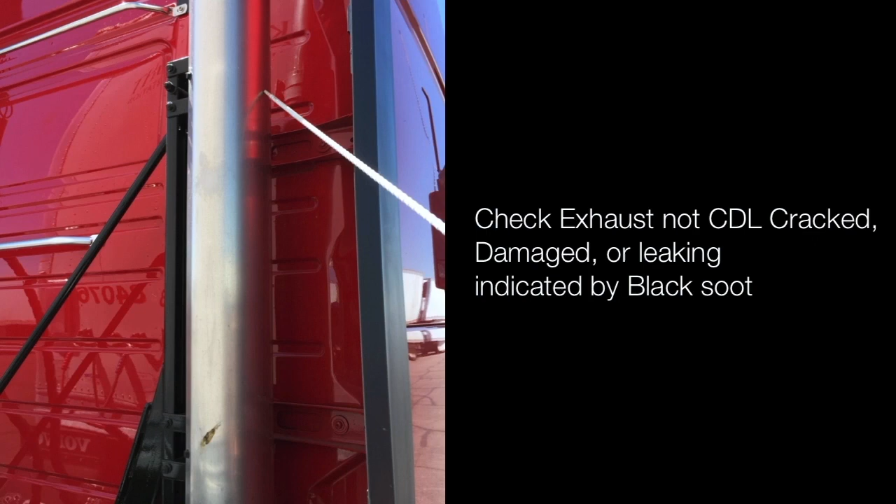Now think about what you may have missed before you tell the examiner you have finished. You can still catch and fix mistakes. Thank you.